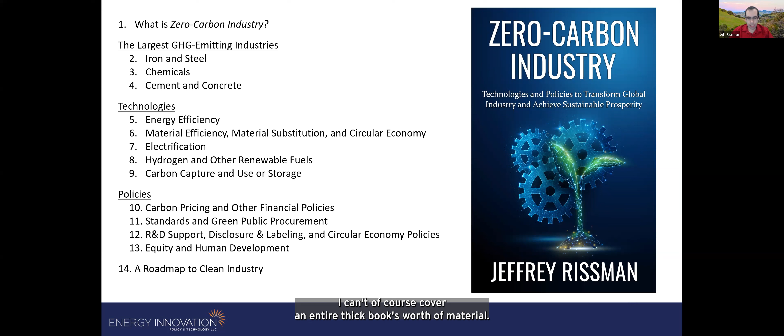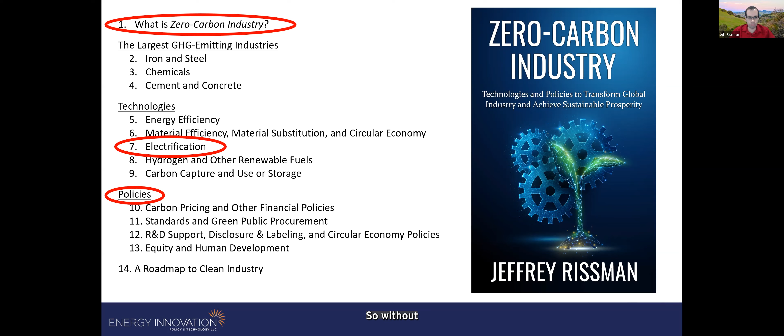This is the high-level table of contents, which I'm showing you because it's also effectively an overview of the major steps and things to do and understand in order to decarbonize industry. I won't read it all off to you, and in today's presentation, I can't, of course, cover an entire thick book's worth of material. We're going to focus on certain parts that are important and good for an overview. We're going to cover some of the overview materials from the first chapter. We're going to do a deeper dive into direct electrification of industrial processes, which is very important and sometimes overlooked, particularly with a push to use hydrogen now in the US and in Europe. We'll do a high-level look at some of the policies. So without further ado, let's jump into the overview.

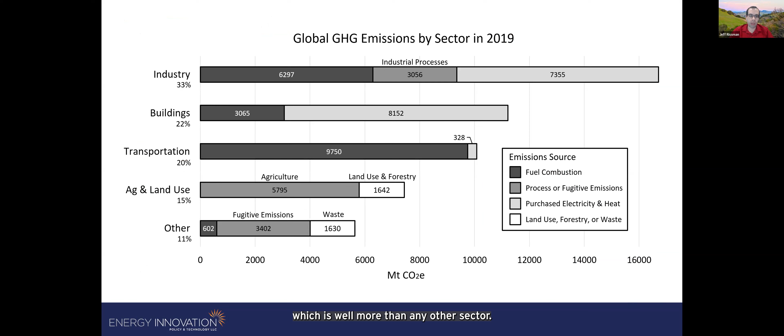Here's a glance at global greenhouse gas emissions by sector. Here we're allocating the emissions from purchased electricity and heat to the sectors that used that electricity and heat, overwhelmingly electricity in the US. And you can see that after reallocating the electricity to the purchasers, industry is about a third of global greenhouse gas emissions, which is well more than any other sector. And if you look at where industrial emissions are coming from, about 45% of the globe's industrial emissions come from China. And they're far and away in the lead, with India and the United States being number 2 and number 3.

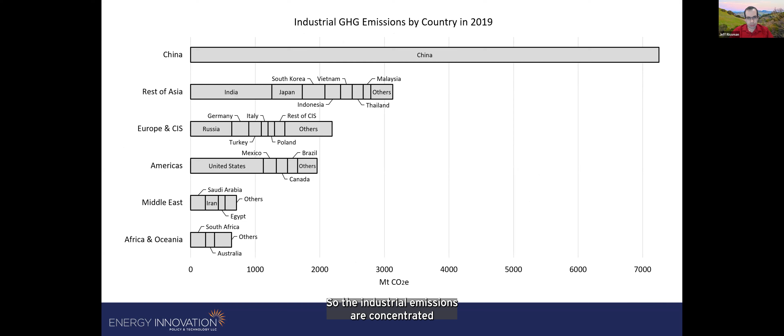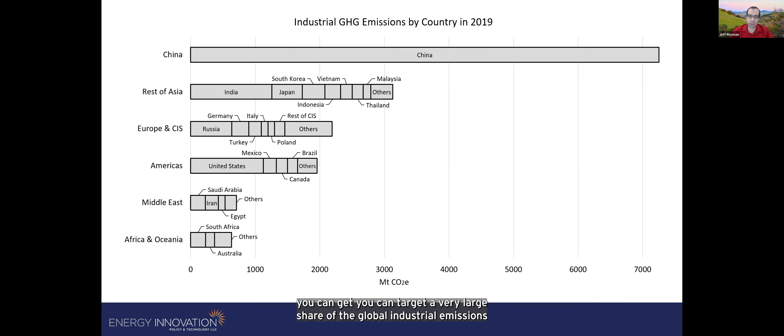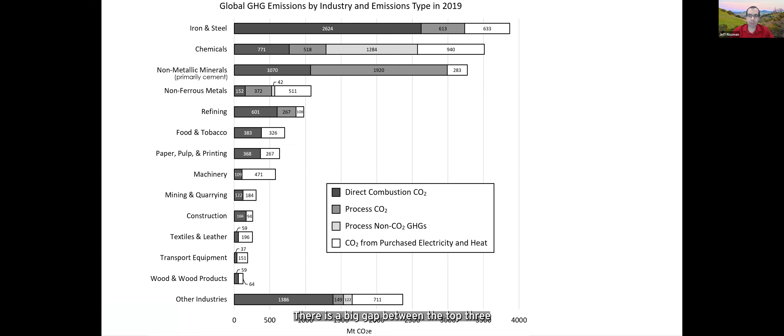The industrial emissions are concentrated in a fairly small number of countries, and if you count the EU as one policymaking area, you can target a very large share of the global industrial emissions by enacting policies in a fairly small number of policymaking venues, countries, and the EU. Here is a breakdown of the industrial emissions by industry and by emissions type. So non-metallic minerals, number 3 there, is primarily cement. So you can see why my book had chapters devoted to iron and steel, chemicals, and cement. There's a big gap between the top three industries and everything else. The top three industries are about 60% of the world's industrial emissions.

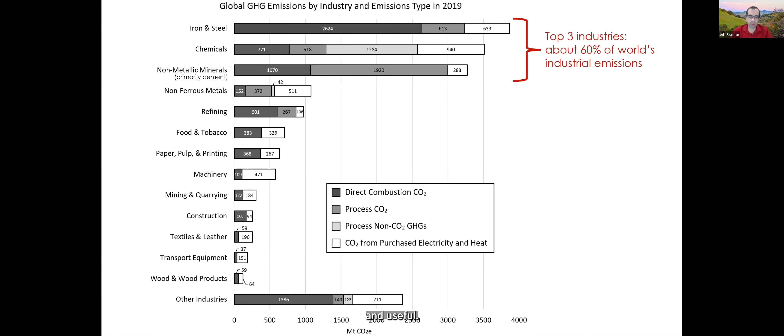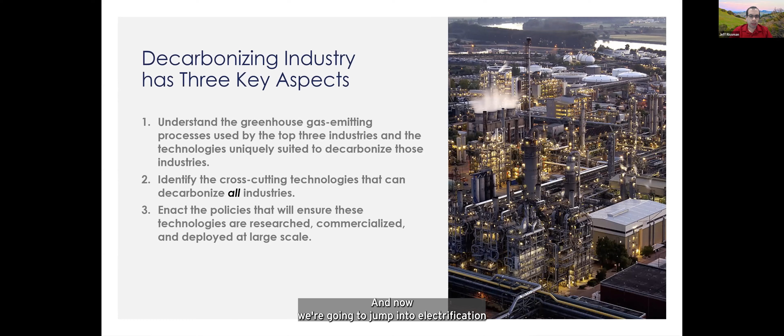But a lot of the technologies we'll be discussing, including electrification, are not just for the top three industries. They are useful across all industries, and that makes them very powerful and useful. So this is again that overview of the high-level structure there, and now we're going to jump into electrification as an example to give you some insights into the technology side. So industry uses fossil fuels essentially for two purposes: energy and feedstocks. Energy is when you burn the fossil fuels, and it's overwhelmingly used for heat, to boil water, to drive industrial processes, etc. The energy to operate machinery like motors and pumps is mostly electrified already.

Feedstocks are the fossil fuels used to make products. They're mostly in the chemicals industry where they make petrochemicals that get converted into output products like fertilizers and plastics. We can't directly electrify feedstocks, meaning replace them with electrons, because you need the atoms, the mass in them, to make up the fertilizers and plastics.

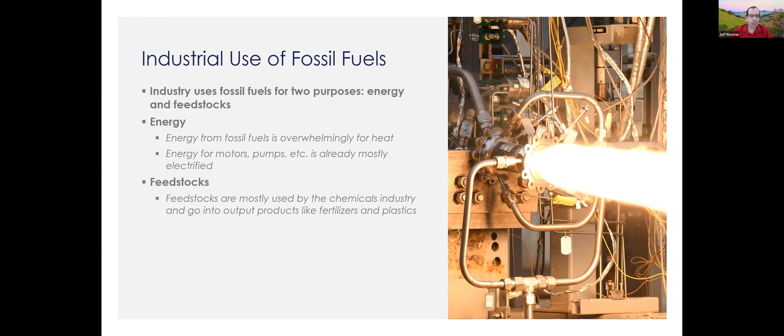Although you could indirectly electrify them by using electricity to make hydrogen and capturing CO2 when you need carbon atoms. This is a graph of the use of fossil fuels and electricity by industry in the United States. The feedstock bar is at the top, but since this is about electrification, we're going to focus on the middle bar, fossil fuels for energy. These two, the left two bars, are the heat used in industrial processes: the left one to power boilers, and the second to the left for other process heating, which can be industrial furnaces or distillation columns or all kinds of things.

This small number of uses on the right are mostly machine drive and other processes that are comparatively easy to electrify. For instance, with machine drive, you would swap in electric motors. Non-process uses are things like heating, ventilation, and air conditioning for the building, or water heating for workers, and those can be electrified using building sector technologies. So when we're talking about electrifying industrial energy use, we're really talking mostly about the left-hand two bars, the heat for industrial processes.

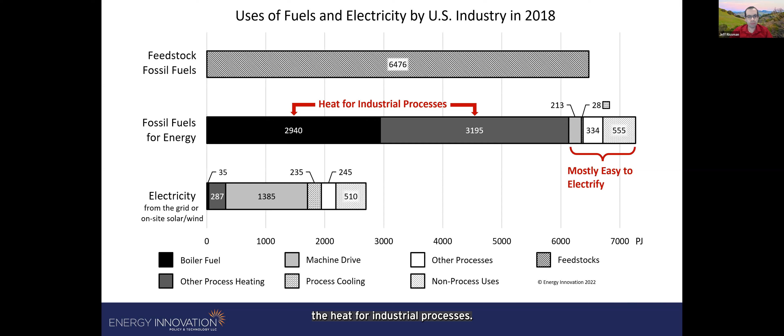If we're talking about heat, we have to look at temperature. This is a breakdown of the temperature demand required for industrial processes in various industries. These data are from the EU, but the overall breakdown per industry would be similar in other countries and regions. The highest temperatures are in the top three industries I mentioned earlier, the top three emitters: iron and steel, non-metallic minerals, and chemicals. Much of the rest of industry has lower temperature demand.

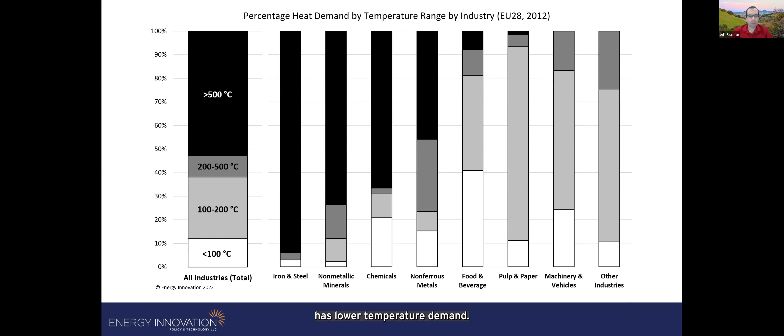There are 8 electrified heat technologies I'll discuss. I'll briefly mention heat storage and a couple of heat replacement technologies. We won't have time to walk through every one of these technologies and how it works, its efficiency, and its temperature range. You can get the book if you want the detailed breakdown.

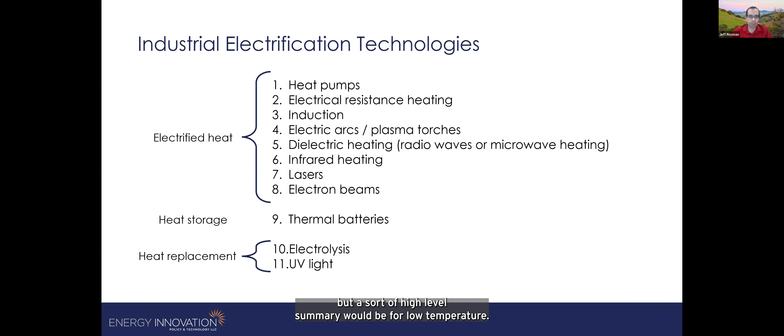A high-level summary would be: for low temperature, you can use heat pumps, which are most efficient, and waste heat recovery. At medium temperature, electric resistance, infrared heating, and dielectric heating, which is like radio wave and microwave heating, similar to your microwave oven. High temperature includes electric arcs, like arc furnaces and arc welding, plasma torches, electromagnetic induction, and then lasers and electron beams, which are good for precision applications like welding and cutting.

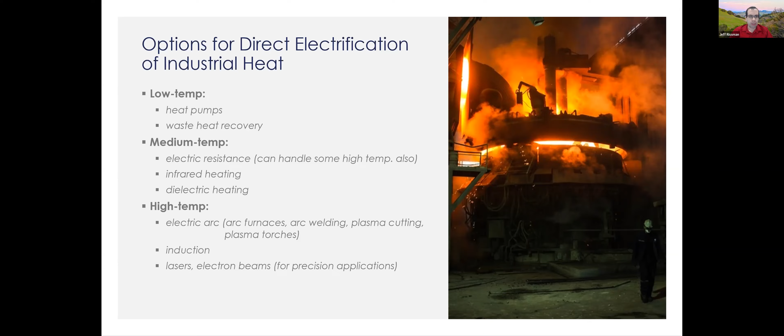What is the electrification potential across industry? There's a study from Madeddu et al. that looked at this for the European Union, dividing it up where the y-axis is the percent of industrial energy use by industry. This excludes feedstocks, of course. The x-axis is the share of electricity by industry. You can see that most of industry can be electrified with technology, either already is electrified, shown in white, or can be electrified with technologies in 3 stages of technological maturity.

Stage 1 are already mature technologies common across many industries, like electric resistance heaters and so on. Stage 2 would be technologies that are already commercialized and used in some industries, but need industry-specific know-how to adapt and use them more widely. Plasma torches might be an example here, where they're used for plasma cutting and various applications.

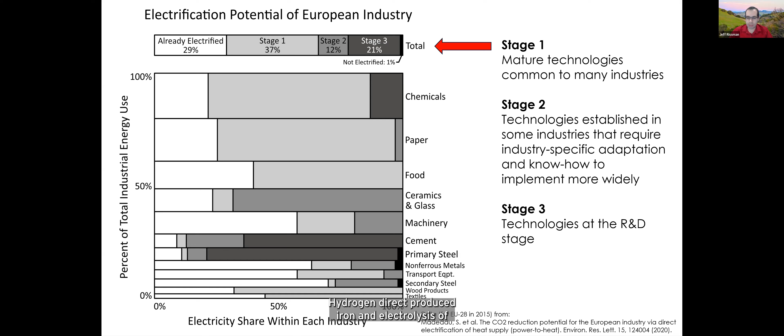Plasma torches can be used to heat a cement kiln, and that's been demonstrated by a company called Cementa, but they're not yet used that way. So you don't need to reinvent plasma torches, you just need to adapt them so that they can be used with cement kilns. Stage 3 would be technologies that are at the R&D stage and still need refinement, with hydrogen direct reduced iron and electrolysis of iron ore being examples.

I won't read off everything in this chart, but it's an illustration of how there are electrified technologies that exist that can meet any temperature demand. So it's something of a misapprehension in the industry that you need fossil fuel or hydrogen combustion to reach certain temperatures, but actually certain electrified processes reach higher temperatures than fossil fuel combustion—that'd be in the bottom row. So you can meet any temperature requirement using electricity.

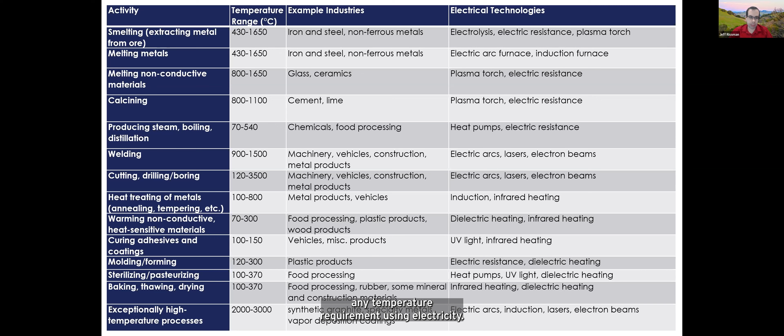So why is it that electricity isn't already used more widely, given that there's no real technical hurdles, no scientific problem with using it? And the answer is cost.

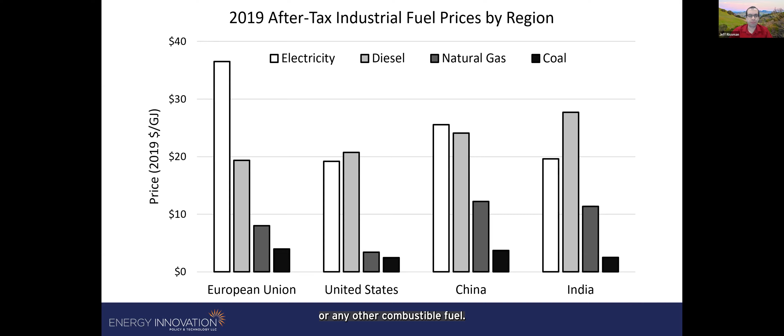This is just a slide with a reminder that you have to account for efficiency of use. So let's look at the efficiency of burning fossil fuels. If you burn them, not all of their heat ends up being useful. There are some heat loss modes that have to be taken into account.

For instance, there are hot exhaust gases from the combustion that escape out the exhaust vent. And then there's water. Even if you pre-dry the fuel, water is formed when you burn the fossil fuel or hydrogen. And water vapor has energy in it that you could get out by condensing it. And that is typically part of the exhaust and is lost to the system.

You can recover some of this later with waste heat recovery, but that's not all of it, and it's at lower temperature and is less useful and less valuable. If you could avoid the losses in the first place, that's better.

One example furnace operating at 1340 degrees Celsius had more than half of the energy lost in the hot exhaust gases, another 10% to deal with moisture, 9% through furnace openings and furnace skin. So this high temperature industrial furnace was found to be 24% efficiency.

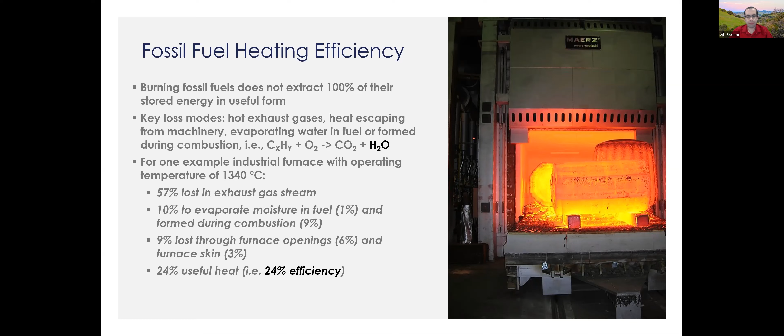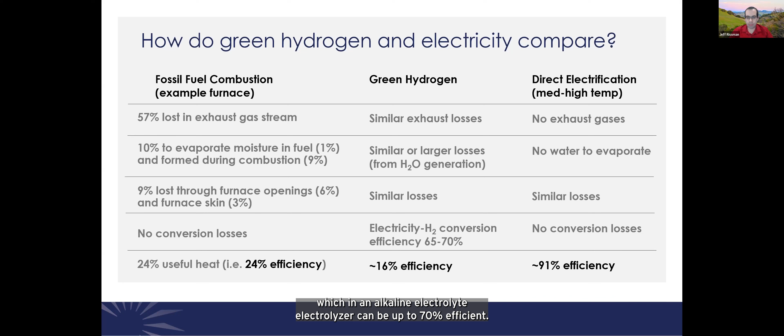Let's compare that to fossil fuels, green hydrogen, and direct electrification. So burning hydrogen has similar losses in that it makes hot exhaust gases and it generates water, but it has additional losses in creating the hydrogen, which in an alkaline electrolyzer can be up to 70% efficient. So you're looking at 16% efficiency for hydrogen in this sort of furnace, 91% if you could do a direct electrification, which has no exhaust gases, no water is formed.

And then you have to look at the air pollution. Of course, fossil fuel combustion emits greenhouse gases and various air pollutants. Hydrogen emits nitrogen oxides. That's because it's splitting the N2 molecules in the air from the energy in the flame. Direct electrification has no air pollution.

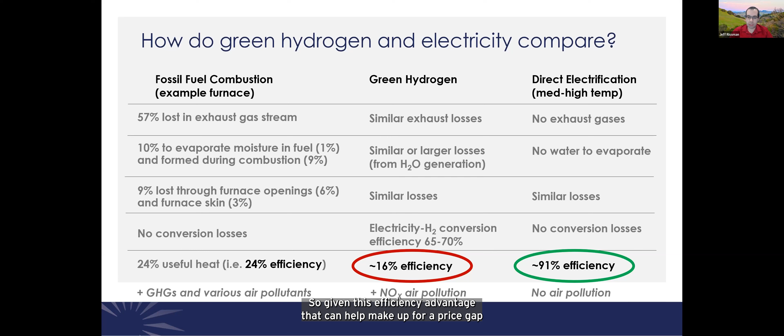So given this efficiency advantage, that can help make up for a price gap and is a key reason why we should be using green hydrogen only when necessary. For instance, the feedstocks I mentioned, which cannot be directly electrified, that's one of the best uses of green hydrogen.

There are other alternatives like fossil fuel combustion with carbon capture or bioenergy, potentially with carbon capture. They are covered in the book. They have their own downsides and limits. See the book for more.

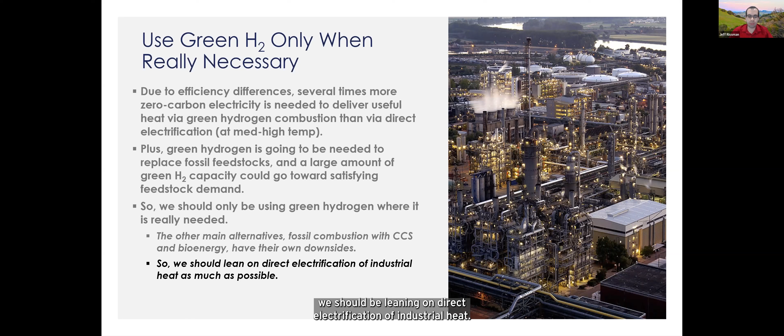So the upshot is, where we can, we should be leaning on direct electrification of industrial heat. Low temperature is worth a special look because boilers are usually used to provide low temperature heat, up to about 165 Celsius or so is the cutoff I'm using for low temperature.

And boilers are more efficient than the fossil-fired high-temperature furnaces like the one above, so I don't want that furnace to seem like a straw man argument. Fossil fuel boilers can achieve efficiencies of 90%, potentially even a little higher. If there's steam, it's 85 to 90. If it's a hot water boiler, it's been demonstrated up to 98%, though real-world practice is lower. In China, the boilers are on average 70 to 79% efficient, and that's where most of them are.

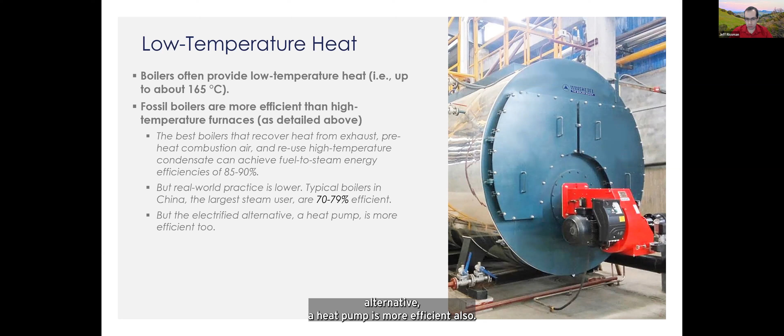But the electrified alternative, a heat pump, is more efficient also. So heat pumps can be more efficient than other electrification technologies because they don't create the heat from the electricity. They move the heat. A heat pump is similar to a refrigerator. So it can achieve efficiencies that are 200 to 500% of the input electricity as the output heat.

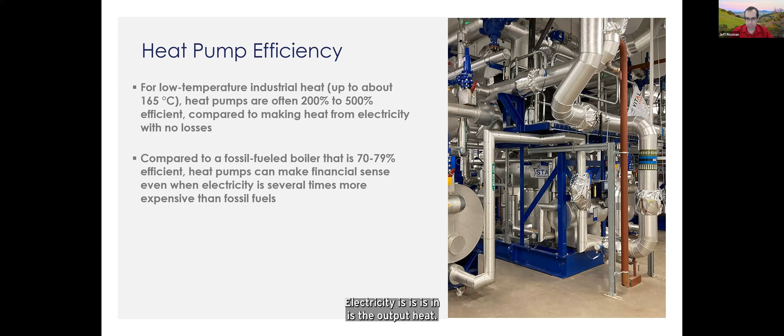This depends on the temperature increase the heat pump is delivering. The higher a temperature increase you want the heat pump to provide, the less efficient it is. The highest temperature commercialized heat pump outputs at 165 degrees Celsius. With a heat source of about 35 C, a little warmer than room temperature, it will be maybe 150 to 160% efficient or so.

Whereas if you only need to boil water and you have a heat source of 30 C, you can get between 2.5 and 3 coefficient of performance. So it gets quite cost effective. It cuts the amount of electricity you need to use down so that you're using maybe a third of the amount of electricity as you would with a resistance heater.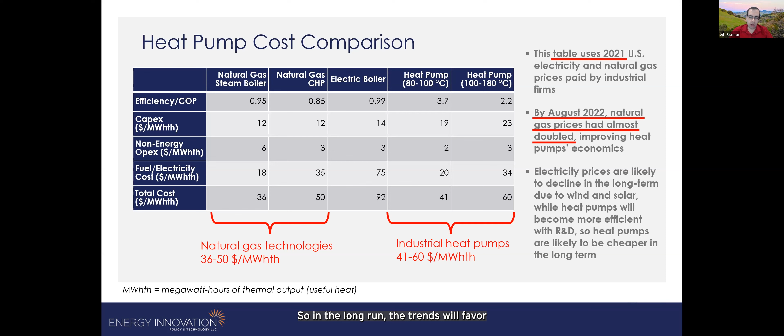It's a good example of efficiency making up that gap in fuel cost. Importantly, this table used 2021 electricity and natural gas prices, but by August 2022, natural gas had almost doubled relative to the 2021 averages used here, which made heat pumps definitively cheaper. Natural gas prices are volatile, moving up and down with geopolitical events, technology, and depletion or discovery of reserves. But electricity is likely to decline in the long term because of solar and wind, which have zero marginal cost generation, making up a larger share of the grid. Not to mention heat pump technology will continue to advance, while natural gas technology is already fairly mature. So in the long run, the trends will favor heat pumps.

Briefly, this is another chart from that report showing cost curves where, depending on the natural gas price and the electricity price paid by firms, either the natural gas boiler, the 80 to 100 C heat pump, or the 100 to 180 C heat pump is more cost effective.

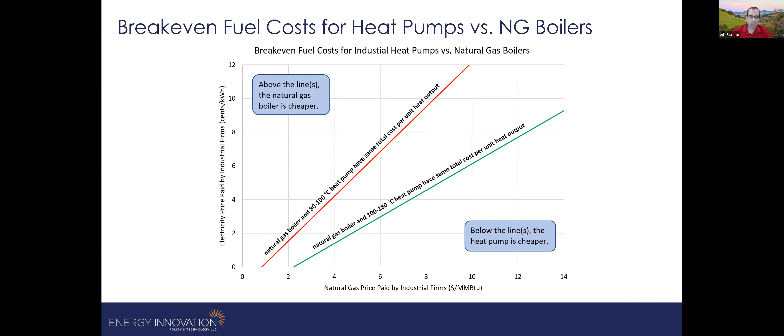So the issue here is commercial readiness, as I briefly mentioned before. All these technologies are based on understood science and engineering. Every one has commercialized applications somewhere in industry, but specific products that replace combustion processes aren't always available in every industry in a commercialized form. I mentioned the plasma torches example, where they can be bought commercially, but only one company has tried using them to heat a cement kiln. That's because there hasn't been enough demand for electrified industrial equipment, so equipment makers haven't prioritized applying these known science and technology principles to new types of equipment.

So that's where policy can help. Policy can kickstart the demand, which will bring products to market, drive down equipment costs, improve efficiency, and help this process move forward more quickly.

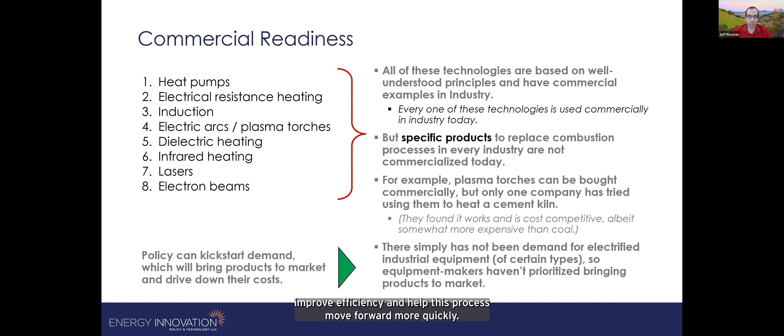That brings us to the last part of my talk today, which is covering policies. This will be a very high-level overview because the book has four chapters on policies of various kinds. It's a major focus along with the technologies and the industries, but due to time constraints, we'll have to focus on high-level things.

So here are some near-term opportunities and needs. You can go for efficiency emissions standards on industrial boilers, which are maybe the first, easier thing to target, and then other sorts of industrial equipment, which are a little more diverse. You can also do efficiency standards.

If they're not fuel specific, meaning you don't have one standard for natural gas boilers and a different standard for electric boilers, then you can comply with the standard by fuel switching—switching from natural gas to electricity, which is used more efficiently. That's even more true for non-boiler types of equipment. If you set fuel-specific efficiency standards, it may improve the efficiency of each type of boiler, but fuel switching may not be as viable a compliance option, and fuel switching is the goal here.

Then there's green government procurement. That's where the government uses its money. The government is a major purchaser of industrial products—cement and concrete in roadways, steel in government buildings and infrastructure, bridges. They can set conditions like requiring it to be made in a low carbon way, and choose to purchase materials with some share of their budget. They can designate certain percentages of government spending on, let's say, steel to be low carbon steel.

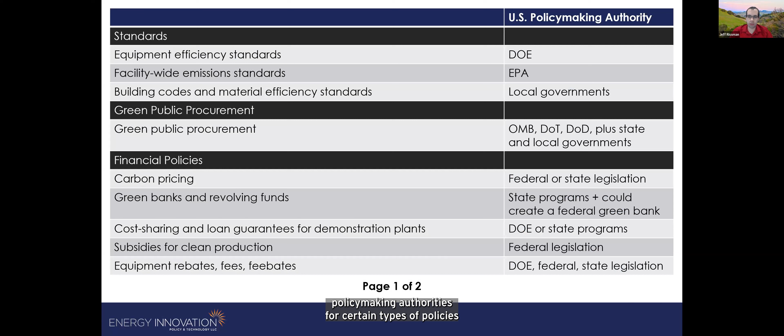There's carbon pricing, which exists in some US states and some countries, et cetera. There's also a table, I won't read it all off, but it looks at some of the US policymaking authorities for certain types of policies that I mentioned before.

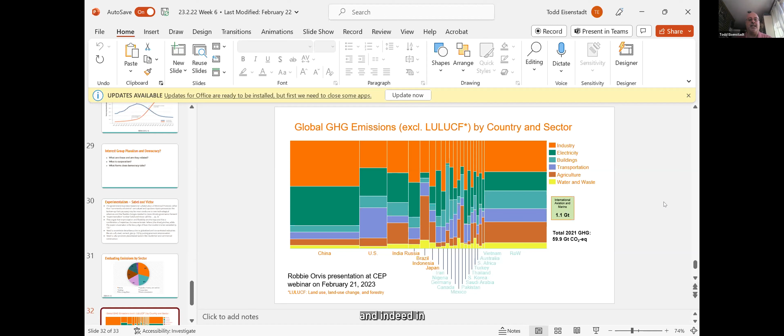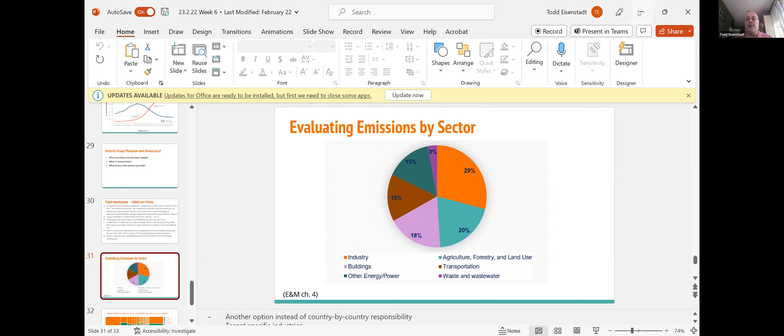And indeed, this is from your 2018 book, cited in a book that I co-authored, a textbook. So, but showing even at that time that industry was a big part of the issue. And I guess the question is that the best place to make the largest investment as a collective, as we try to face this problem?

It seems that the possibility, given that technologies exist to address problems, if they're more cost efficient, or if we find ways to make them so, perhaps with government action like subsidies, if we can do this, it seems that we can solve the biggest part of the problem through changes, especially in the industry sector, but also in the somewhat related electricity sector, or I guess as it's called, the energy sector, but which in part, a good part of that is also electrification with renewables. It seems that if we address the problems there, it almost means that we don't really have to do nearly as much in some of the more difficult sectors, such as building retrofits or land use, which is extremely complicated. I don't know. Do you have any comment about that?

Yeah, I do. So one thing is, to address climate change, it is necessary to address all sectors, because there's a lot of emissions coming from each sector. And while they may not all be equal in priority, I don't think it's necessarily the best idea to play off one against the other when you could also be thinking about them versus other priorities that aren't mitigating climate change, and say we should focus more on mitigating climate change and less on such and such other thing.